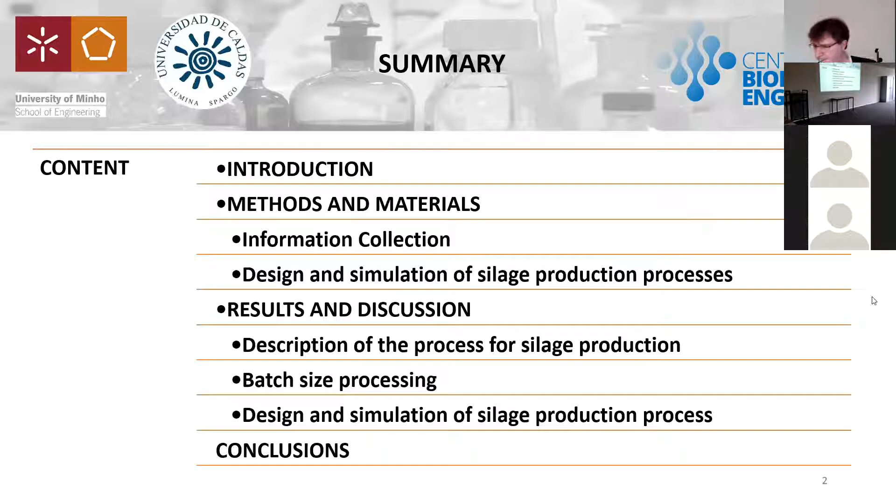This is the outline of my presentation about our work related to exploring a new way through process simulation for valorization of waste from agro-industry of plantain, an important agricultural product in Colombia, a tropical country where significant layers of population use plantain as a source of calories in the form of starch for preparing food.

Plantain is a product very similar to banana, but while banana is consumed as a sweet fruit, plantain is used mostly in a green stage for preparing soups or in a mature stage for preparing fried snacks. The most consumed variety is the Dominico Hartón clone for its starch content and sensorial properties.

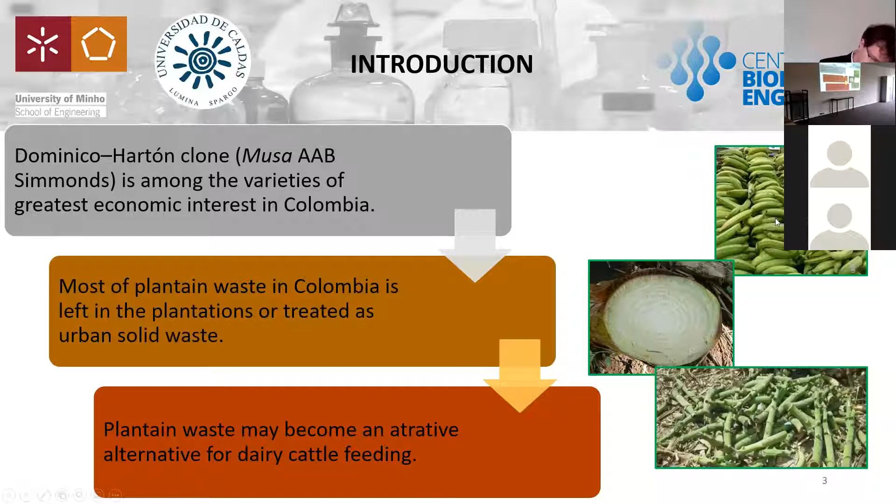The cropping and harvesting of plantain generates important amounts of waste materials, like the pseudostem, the rachis, and even some rejected fruits because of their appearance or small size. So our proposal is that feed for dairy cattle, specifically silage, can be produced from these residues from plantain agro-industry.

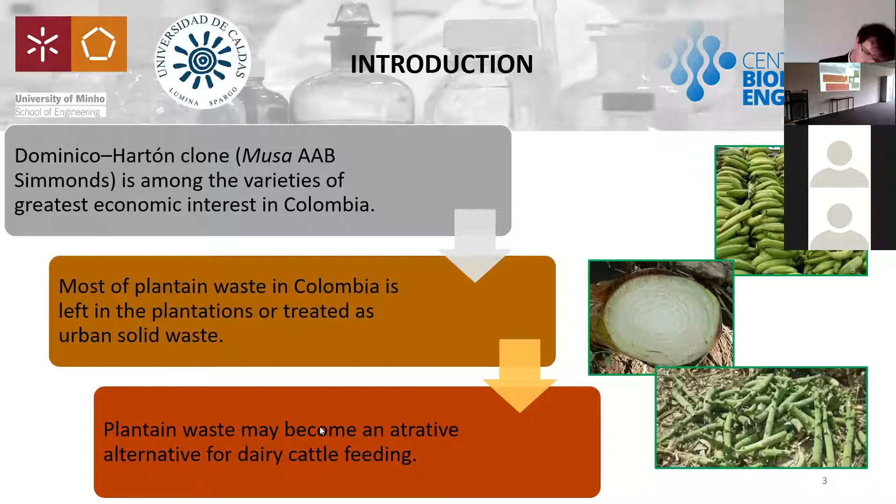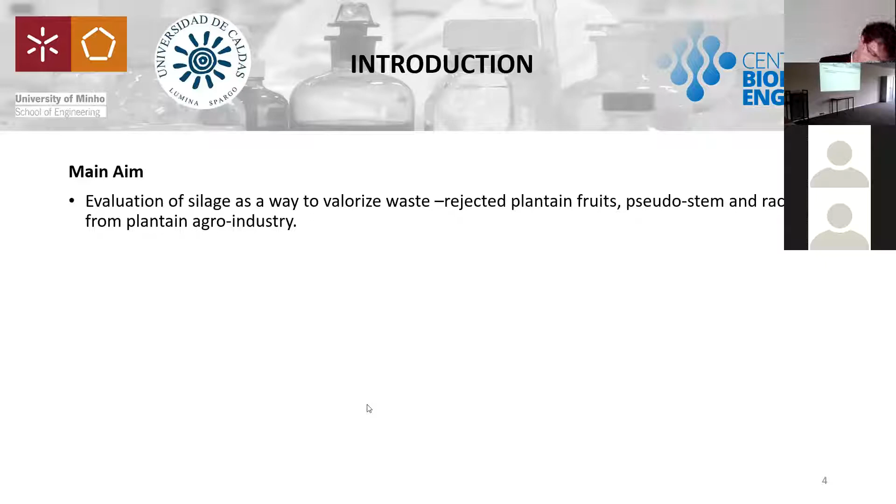So the main aim of our work in the context of bioprocess systems engineering is to evaluate silage production as a way to valorize waste from plantain agribusiness. Main methods we used for our work involved the calculation of mass balances using the software SuperPro Designer, a simulation software that works very well for biotechnological processes with solid materials under batch regime.

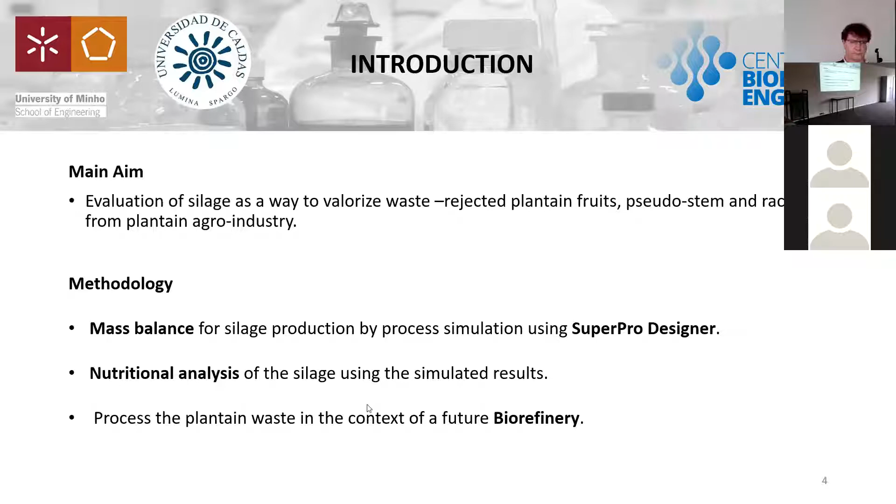Finally, we globally analyze how this simulated process can be integrated in the overall design of a future second-generation biorefinery for processing plantain residues that we are developing currently. For this, we have performed an extensive and comprehensive search of information in different databases and technical documents.

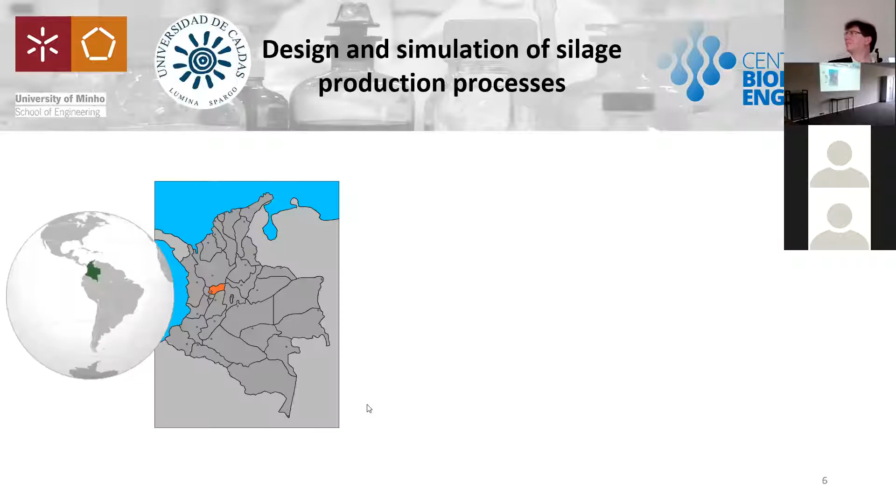For simulation in SuperPro Designer, it's necessary to define the batch size. For this, we have considered the historical plantain production data from 2007 to 2018 in Caldas province, that is located in the central western region of Colombia, among the mountains.

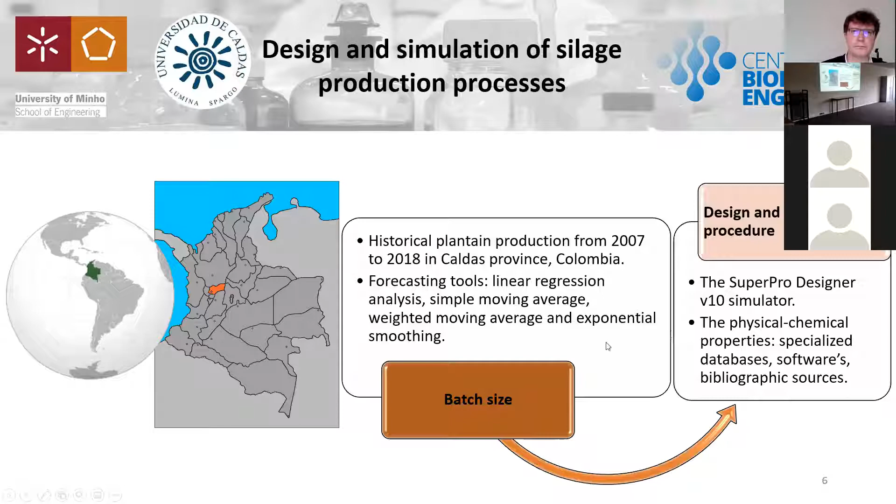Then, forecasting tools as linear regression analysis, simple moving average, weighted moving average, and exponential smoothing were applied to this data. For simulation in SuperPro Designer, the physicochemical properties of the compounds involved in the process from specialized databases, software calculation, and bibliographic sources were introduced into the simulator in order to calculate the batch size.

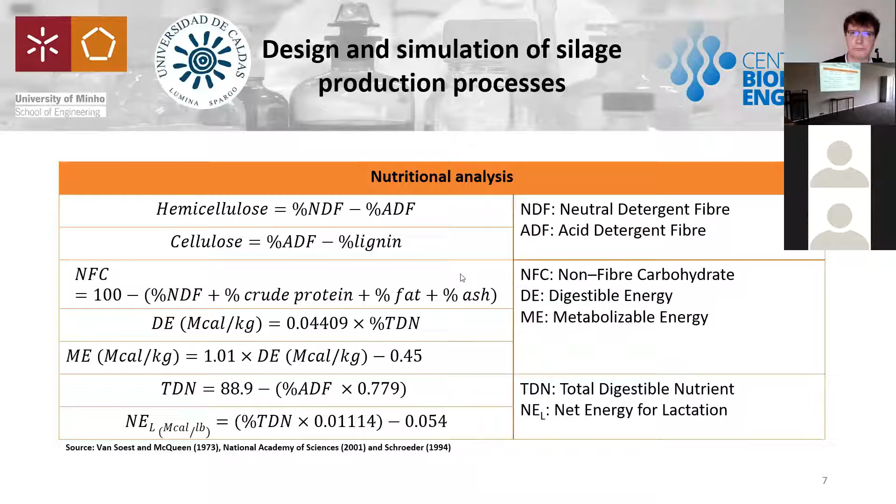In this slide, you can see the different formulas we apply to perform the nutritional analysis from the simulation results for both the residues and the feed products. Here, you can see the nutritional parameters used as a reference to design the product from specialized sources for dairy cattle feed.

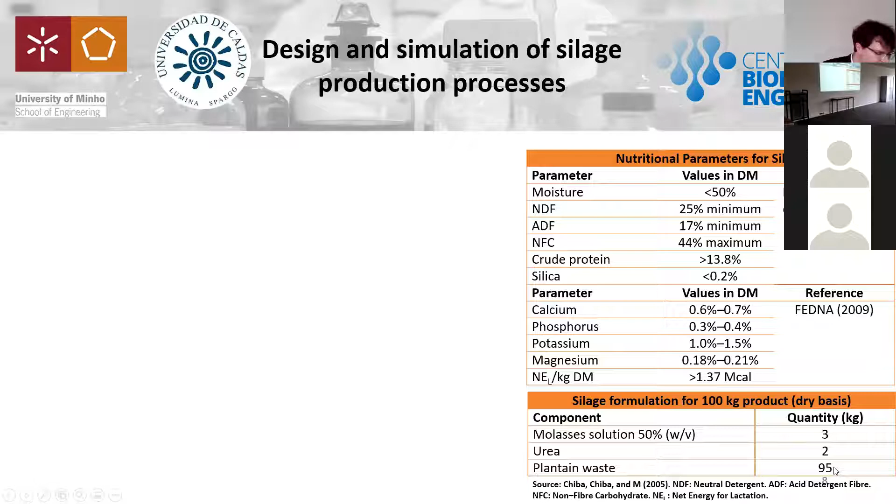And this is the composition of the product, the silage, that we took into account in our simulation. This composition involves 95 kilograms of plantain waste for 100 kilograms silage. This is an overall scheme of the simulation procedure we have performed to analyze the process for production of silage from plantain waste.

In general, we define the first operation unit or process and the input and output streams. Then we specify the so-called unit procedures such as transfer, load, react, mix, discharge, etc. And we calculated the material and energy balances for that first equipment. After that, we added the following unit operation or process and repeated the procedure until the final product is obtained. At the end, we performed the economic evaluation and generated the corresponding reports.

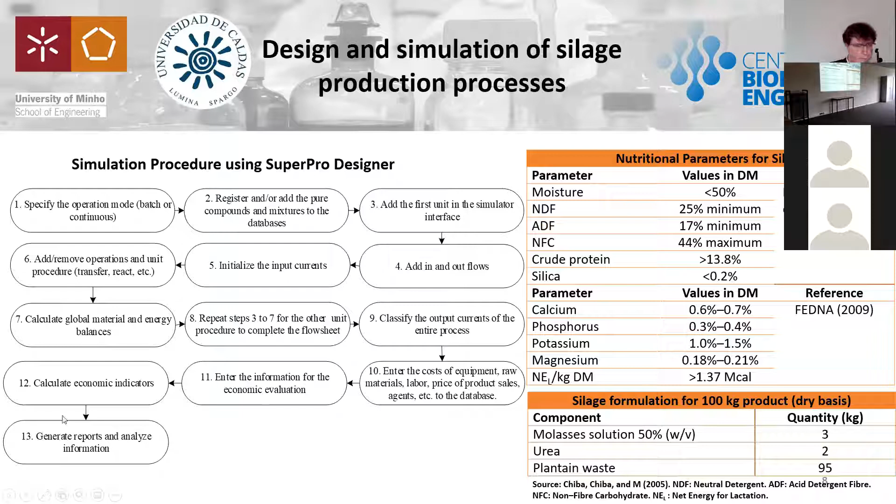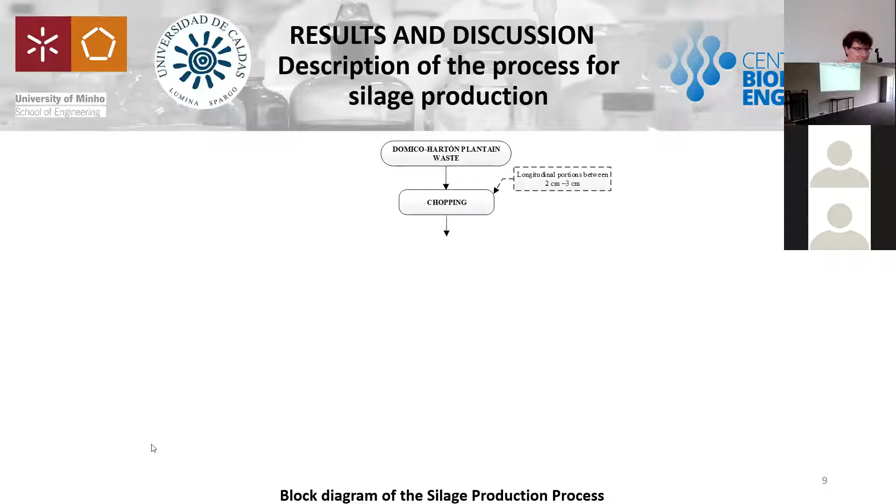As a result of our work, we defined the block diagram of a process for producing silage using plantain waste. This process includes different process steps such as chopping, washing, grinding, mixing, and packing.

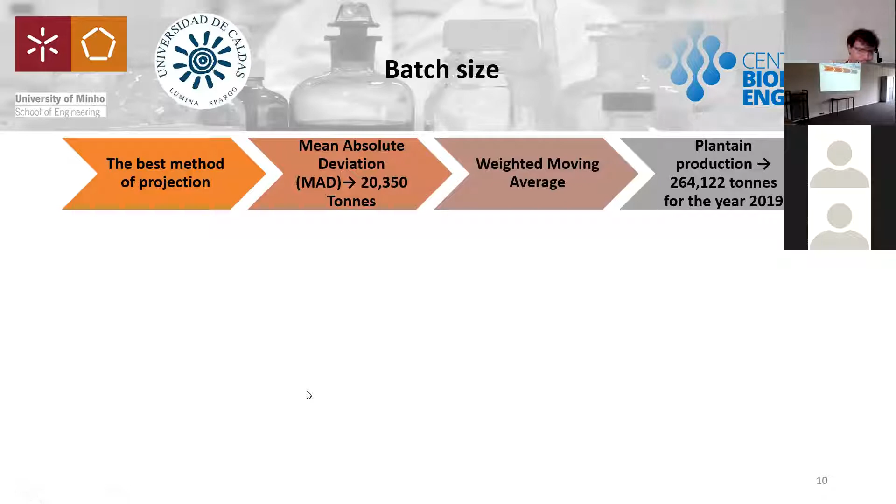From the several methods applied to forecast the production of plantain in Caldas province, we chose the weighted moving average method, considering that it had the lowest mean absolute deviation. So the forecasted production for the year 2019, the year of the evaluation, was about 264,000 tons.

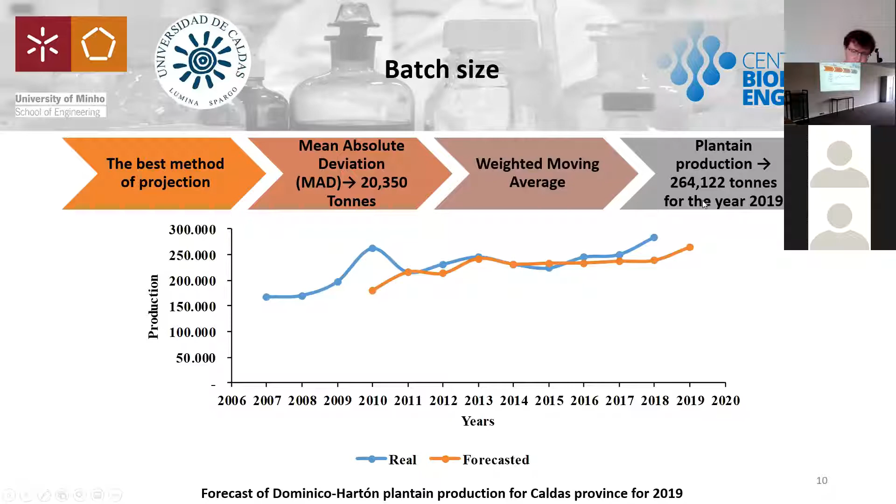Then we selected these waste streams from plantain agribusiness for subsequent analysis by simulation: pseudostem, that includes the leaf sheaths and the floral stalks, the rachis, the bunch where the fruits are attached to, and rejected fruit. This total quantity in kilograms per day is the value that we have used at the beginning of the simulation in SuperPro Designer software.

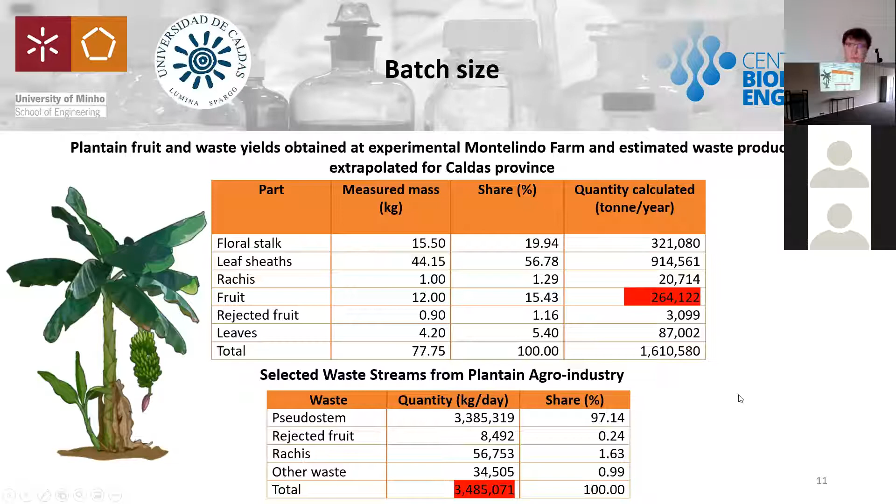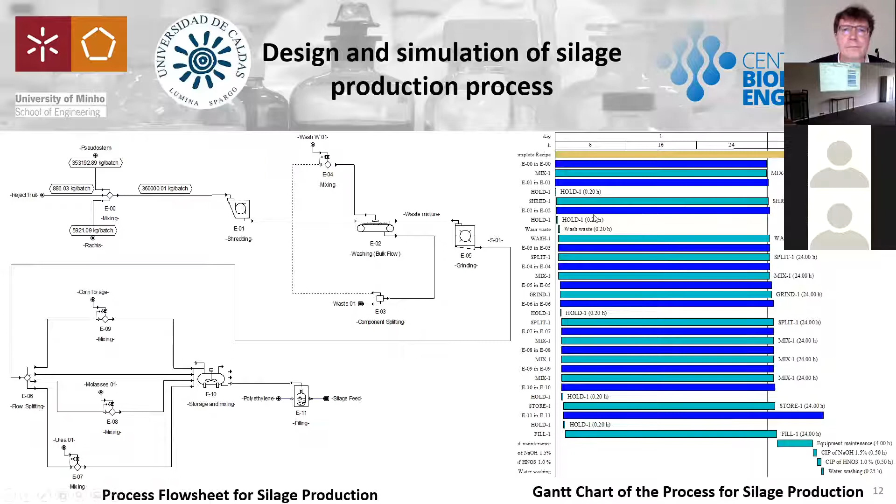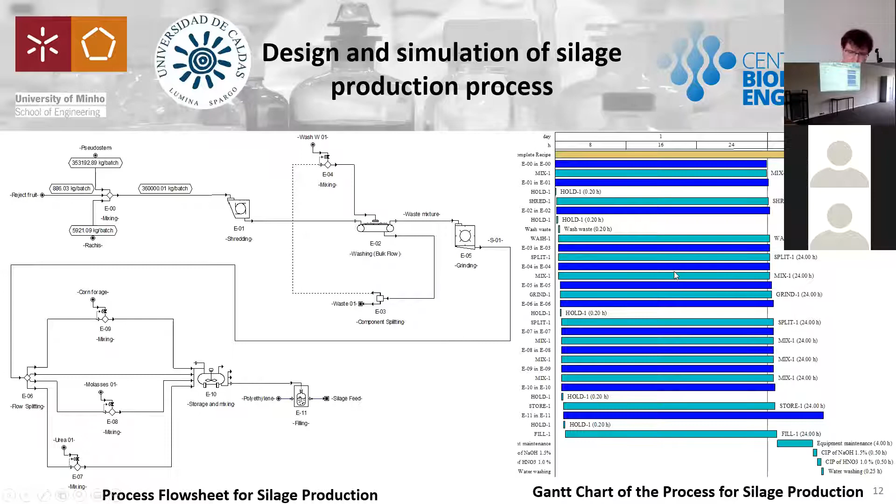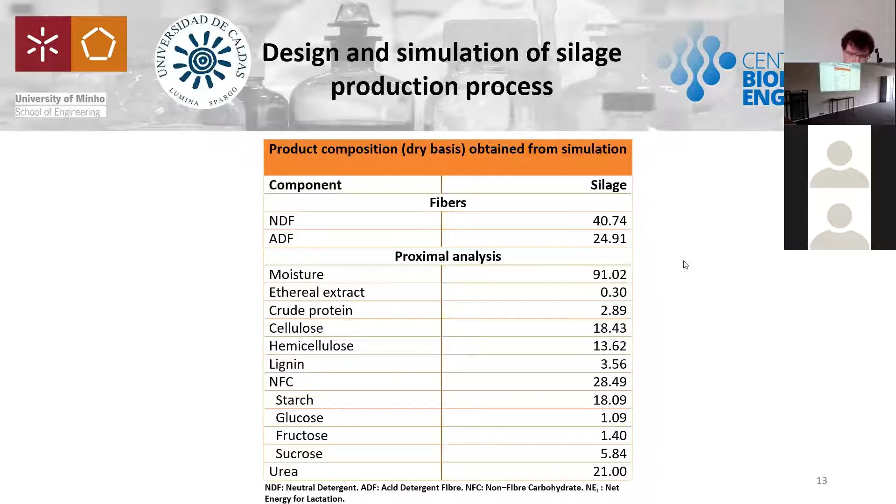This is the process flow sheet that we defined and simulated, as well as the Gantt chart. This chart shows the scheduling of each operation included in the process. Remember that this process operates at batch regime. This table shows the final results from the simulation of the composition analysis of the silage obtained. This table follows in the next slide.

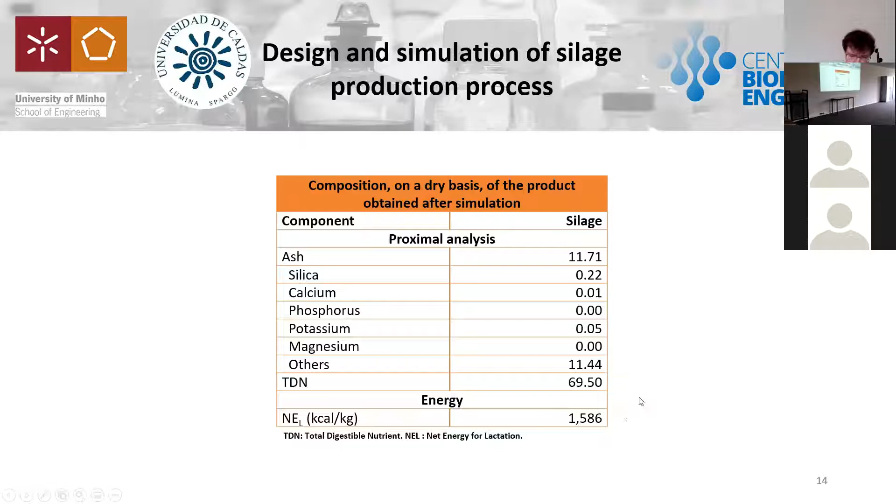Notice that the energy for lactation is above the reference value established by some specialized organization as the Spanish Foundation for the Development of Animal Nutrition for dairy cattle feed. This value should be higher than 1.5 megacalories per kilogram dry matter in the feed product. So our product meets this requirement.

As conclusions of our work, we highlight that considering the available literature, computer-assisted simulation was used for the first time to design and nutritionally evaluate the production of silage for feeding dairy cattle from plantain residues. Obtained results indicate that silage is a viable solution for the valorization of residues from plantain agro-industry.

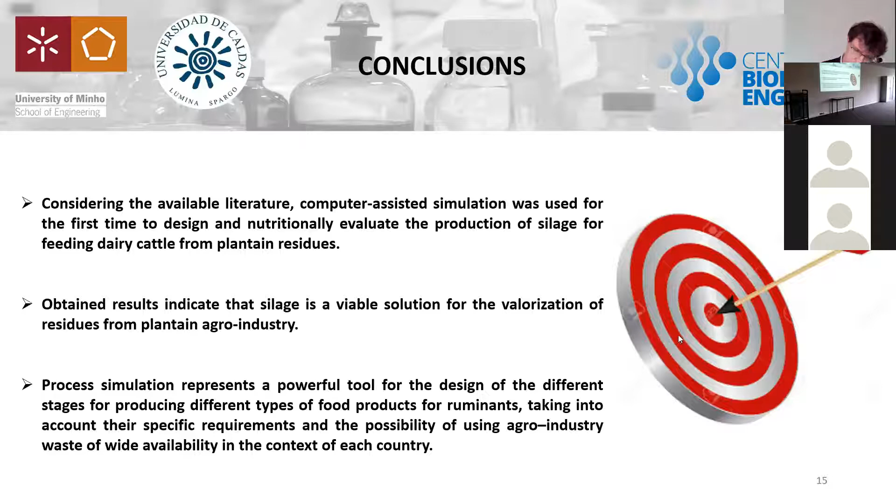Process simulation represents a powerful tool for the design of the different stages for producing different types of food products for ruminants, taking into account their specific requirements and the possibility of using agro-industry waste of wide availability in the context of each country.